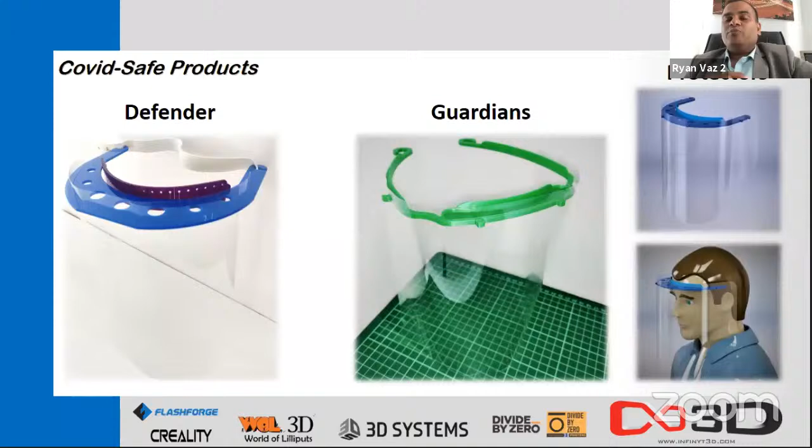These 3 models were the ones that were running around, that were being used. We made about 4,000 face shields, and we gave out 3,000 for free, and around 1,000 of them were sold.

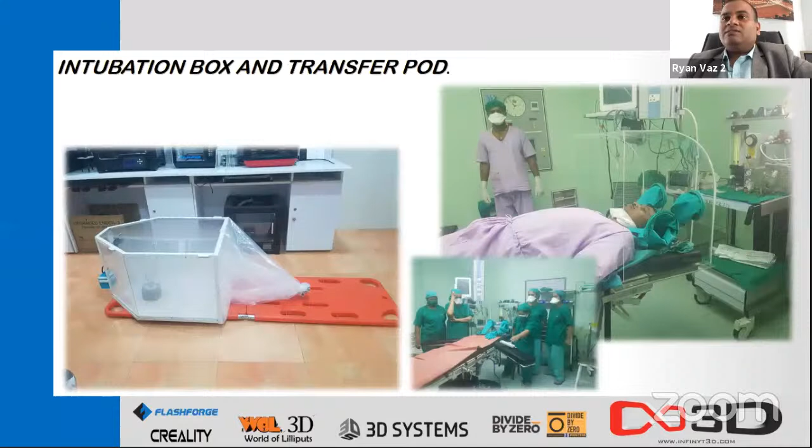We also made something called an intubation box. When a doctor is putting a pipe into the person's throat, that process is called intubation. When he does the process, the patient tends to cough and leave out a lot of spit and blood into the air. To avoid the blood and spit falling onto the patient's face, they wanted a covering. A face mask does not really help. So we made this kind of a box wherein the doctor stands behind, puts her hands in the gloves, and does the process of intubation.

Similarly, the Navy asked us to create something called a transfer pod, in case there is a patient that needs to be taken from one place to the other, and they do not want the risk of someone else getting infected, or the driver, or the pilot getting infected. So they asked us to develop this pod. The shell has been done by the Navy themselves, and we did the concept, but where they were stuck on was this. It looks like a simple plastic thing, but it required a lot of thinking on how to sort this out. The solution that we finally gave them was so airtight that smoke did not come out of it. This was the smoke test that is going on.

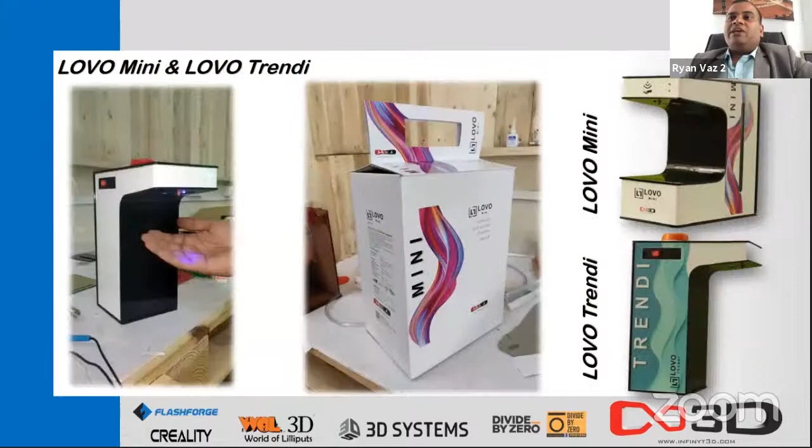And then finally, we came out with LOVO as a product. The LOVO is a sensor-based sanitizer dispenser, and this has been doing very well in the market in the last 2 months since we launched it, and we are having good fun marketing it and learning new things in this entire process.

Coming back to 3D printing, what is 3D printing and how can it help you? All these products that were developed, somewhere or the other, we used printing to come up with these products. This 3D printing helped us build this product range for us. And not just us - these are products we ourselves developed, but during these 6 months, there were a number of people who came to us saying they want to develop new products and new items, and we were helping them with it.

Let me take you through a small journey of what 3D printing is. If you look at the gallery view, one of the videos is showing one of my printers printing a pot - it's a self-watering pot, and you can see it live. That is being printed on an Ender 3 using PLA material, that is polylactic acid.

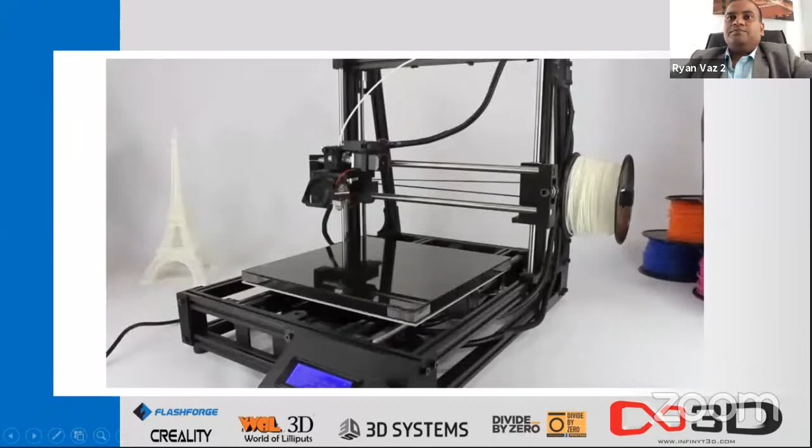Let me just show you a small video that will explain to you the 3D printing process for those who do not know.

Now, the Eiffel Tower over here has been printed on this machine. The machine starts basically with nothing, and that is why it is called an additive manufacturing process. There are 2 ways that you manufacture: one is you add, one is you remove. In a normal carving process, you take a block of wood and then start chipping off. But in additive manufacturing, you start with 0. Here the plastic goes right on top and then comes down, melts through the nozzle, and is poured out in a very precise form to create any product that you want.

And that is the beauty of 3D printing - because it is additive, it can make complex structures. It does not care how complex your part is, it can just print. Of course, there are certain rules that you have to follow for 3D printing. If you follow those rules, you are able to do some amazing stuff using 3D printing.

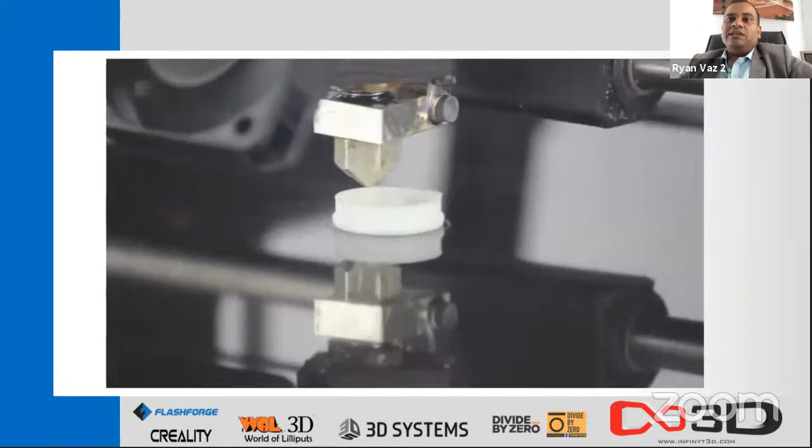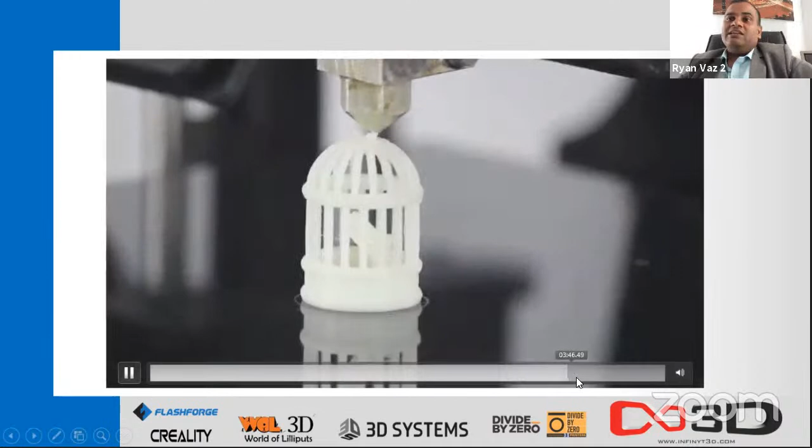Let me go very quickly with this because we have very little time. So what it does is basically print a layer, and then it created this. Now it is printing the 3rd layer, and progressively, layer upon layer, it keeps printing till you get something like this. As you can see, it has started lifting up and creating an object. What it is creating here is a bird inside a cage, and this is possible only in a technology like this - an additive manufacturing technology. It is creating a bird inside a cage in a single piece. Any other technology, you would probably have to do it in 2 different pieces and then join them together. That is where 3D printing has an edge over all other technologies.

So how does the 3D printing process work? It starts with an idea.

You take an idea, and a lot of us keep getting ideas, but we don't do anything with it. These ideas come in the strangest of moments - when we are walking on the beach, sitting in the washroom, having a bath, when you're cooking - and then you get an idea, and you never know, that idea could be one of the best. However, because of the constraint of how we're going to manufacture, where are we going to manufacture, we forget to make use of this idea. I would strongly recommend that if you have an idea, start either jotting it down, or if you know designing, then go to the next stage and start designing and making your idea real. Because a lot of good ideas die in our brains itself. I would love if a lot more people started paying more attention to their ideas.

So you start with an idea, you then create a design of it. Then there is a small process of analysis to check whether the design is good, whether it is printable, whether it is workable. You might want to do your design tests. Okay, and then you go through a slicing software. 3D printer does not understand what you design. All it understands is a series of codes which says go here, pour this much plastic, go there, pour that much plastic. To translate your design into something, we use a software called a slicer, which understands your design and then converts it into codes. And then you go to 3D printing.

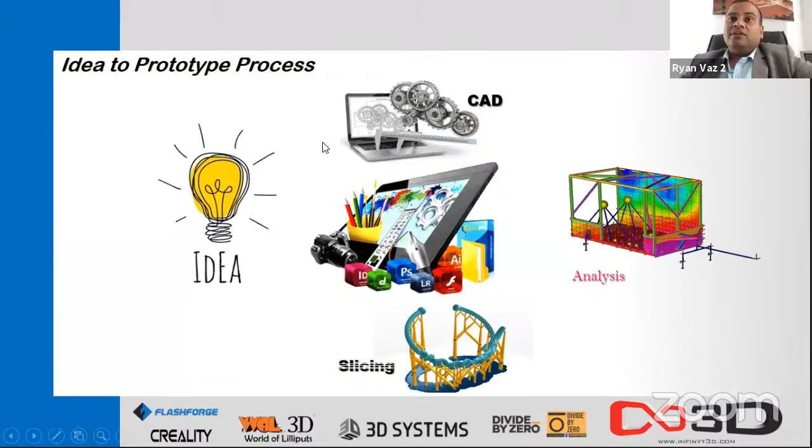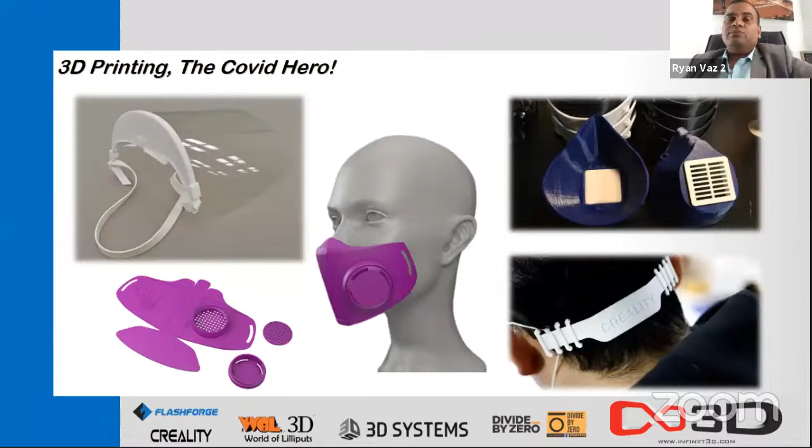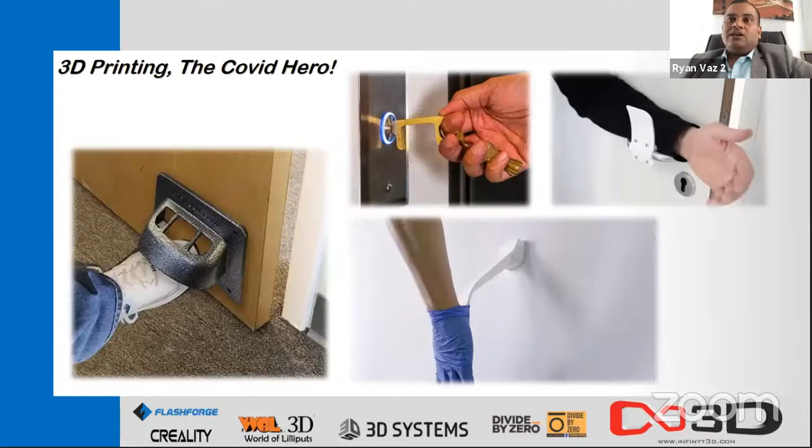3D printing also has made things like this. So this is the COVID key. Basically, you use the COVID key to not open anything directly. You can carry your bags with it. You can open doors with it. You can touch your buttons, the ATM buttons or the lift buttons, using the COVID key. This is so that you don't touch your hand to the lock or to the latch. This is to remove gloves.

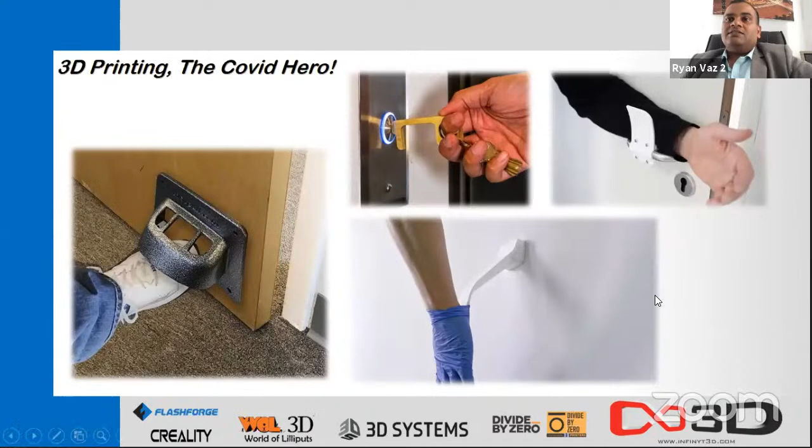Recently, I read an article that said a lot of people, nurses and doctors, were infected not during the process of treating patients, but when they were actually removing the gloves, because they did not know how to remove the gloves properly. And then when there was virus on the gloves, it would touch them. And that was very sad, because after they finish an entire day, when they are wearily pulling off the gloves, that is where they get infected. So 3D printing tools like this help them remove gloves.

And then for doors, to open and close them, you now have a foot puller. This is called a foot puller, that has been 3D printed and then fixed to the edge of your door. So you don't use your hand, but actually use your shoes or your legs to open and close a door. Now this is just a few examples that I was able to pull out to show you, because otherwise I would have a few slides only on this. But this is basically telling you what 3D printing can do. Open your mind towards what you can do using the same technology to make things and life easier for you. Any technology that makes life easy is what makes it valuable. And 3D printing can do it. However, a lot of us are not able to connect how this can actually happen for us.

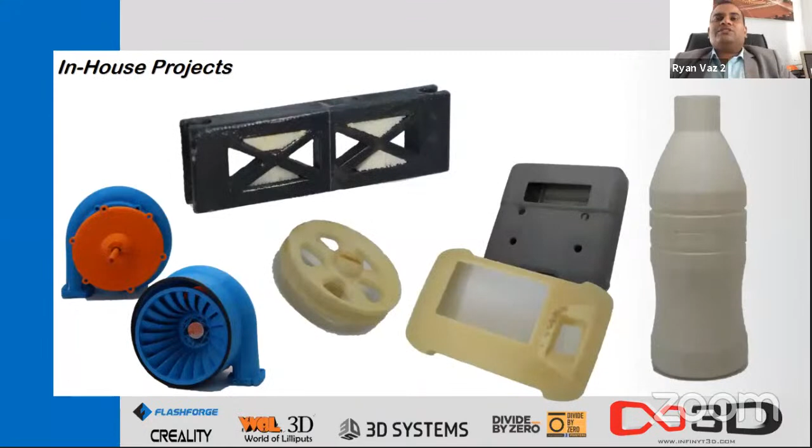Here are some of the things that we did in our office. This is a very old project, almost about 5 years back.

A company wanted to create a modular bracket system to hold pipes, and this thing had to be taken to the US. They created a modular system like this. What you see are small keyholes, wherein the other parts slide in. This has been 3D printed, which supports the sliding, and it creates an entire round bracket. This is just one part of it. This entire set was then taken to the US and they tested it over there. I'm not sure whether it was successful or unsuccessful, but yes, we delivered it successfully.

Over here we have a bottle. A bottling company came to us. It seems that a year back, when they ordered a new mold for a bottle, and the mold came and they actually started production, they realized that they had ordered a 250ml water liquid container, and the bottle itself was 250ml, whereas government stipulation says it has to be 25% more than the actual quantity it is supposed to hold. So they were forced to rework on that mold, and that cost them quite a bit.

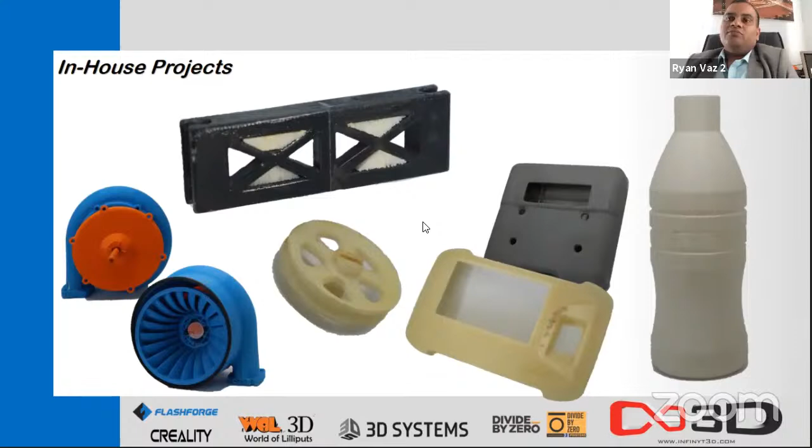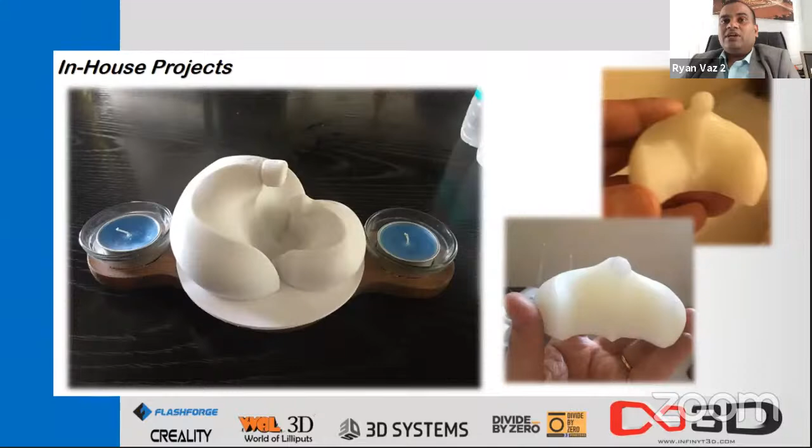Which they approved. And then finally we made wax molds for them and gave it so that they could give the wax molds to them. This was a very interesting project. Took a lot of our time and energy, but it was quite fulfilling at the end.

What are the immediate applications for 3D printing and where all can we use it? Did you know that a lot of your jewelry, someone told me 90%, someone told me 80%, but I'm quite confident that a lot of your jewelry today is being done using 3D printing.

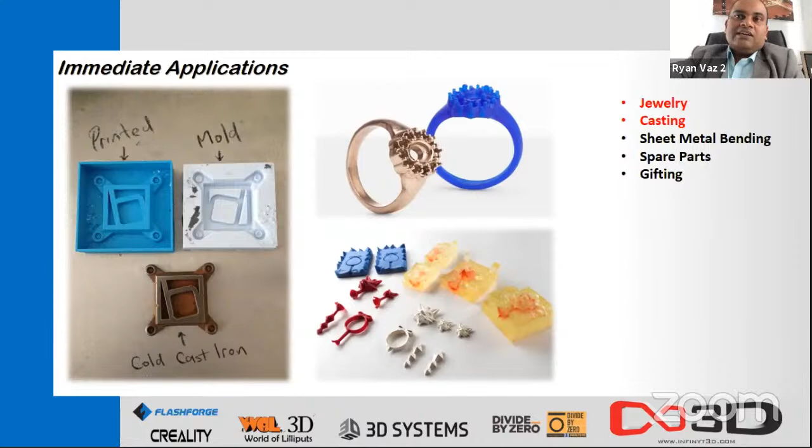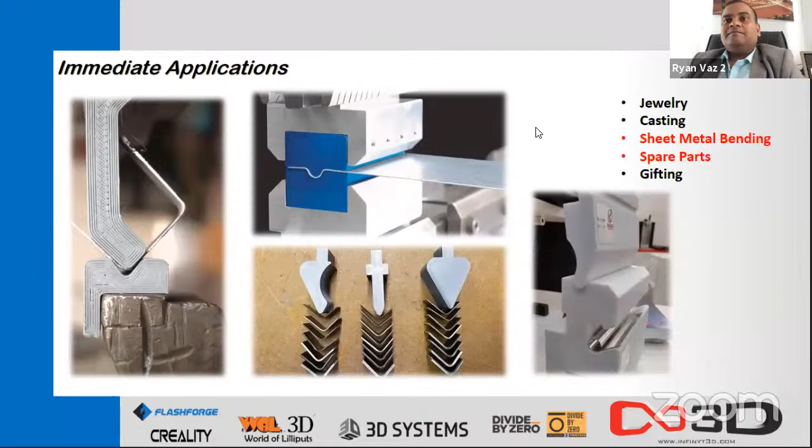Gifting. It's amazing how customized and how interesting you can make, or rather how gifting can be made using 3D printing.

Here is a small celluloid lighting fixture wherein you put lights. It gives brilliant, lovely shadows along the wall, and we've made it glow in the dark using the dark filament. So when the light goes off, this thing shines a brilliant green.

Here again, a night lamp, which is called a lithophane, which basically allows a certain amount of light to pass through, and through that it creates lovely pictures. We have done this for a client wherein he's created his entire family pictures onto this night lamp. Google had an event a couple of years back, and for all their guests and speakers, we gave them this lithophane, which looks just plain and white when it is switched off, but when it is switched on, it looks like this. All it needs is a photograph.

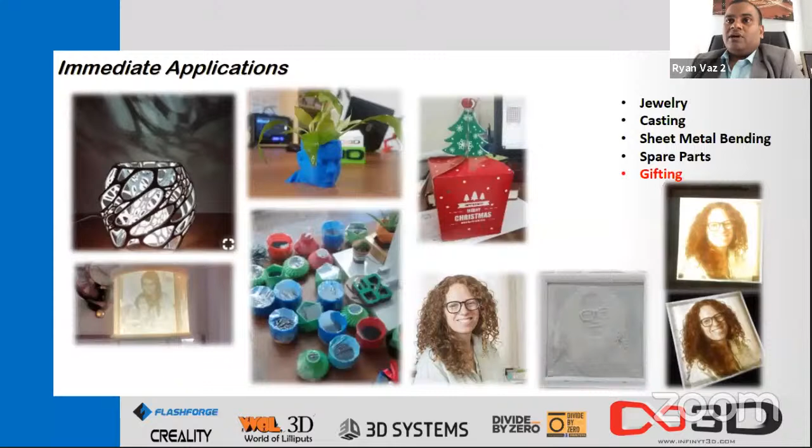Making a container also is quite costly. Using 3D printing, we can actually create a container or an enclosure that perfectly fits your circuit boards, and if it's your requirement, gives it an aesthetic look, gives it a professional look, and you can pitch it to your customers, or you can create your own device.

I know of people who have made their own mini computers using this, wherein they used a Raspberry Pi, connected to a screen, and then used a 3D printed enclosure around it. I know people who have created a number of devices, some to check blood, some to transfer data. So many things people have done when they've used the 3D printed enclosure around this.

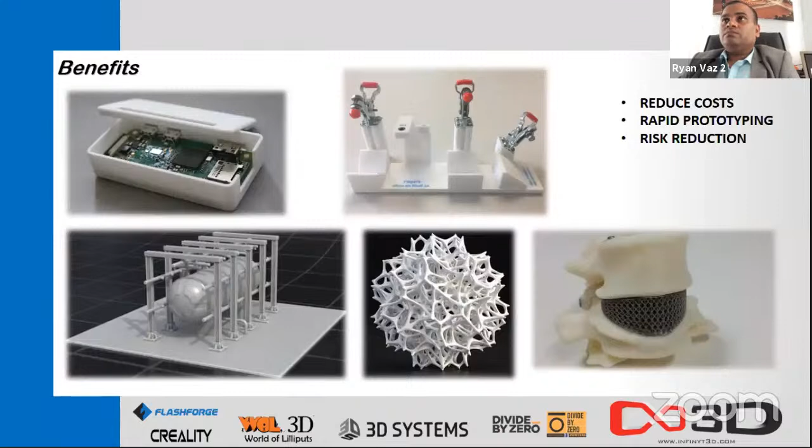3D printing also reduces your risk - a risk in terms of your idea failing, a risk in terms of understanding where the failure points are even before it fails. It helps you get a real life perspective of what your part will be, what your product will be. You can create the part, look at it in miniature, and say, okay, this is how it will look, this is how it will feel. Maybe it is good for me, maybe it is not.

3D printing allows you to prepare very complex parts. In the medical industry also, there are some students, some doctors who wanted to operate on a girl. It was a brain surgery. Rather than doing the operation directly, they 3D printed her skull, did a mock surgery on the skull first, timed it, and then they opened up her brain, so that they were sure of what they're going to do.

Similarly, here there's a spine, and they wanted a fixture inside the spine, and they 3D printed it. Complex stuff like this can be done using 3D printing, because 3D printing also gives you design flexibility. Complexity is free in this, and it helps you cross boundaries which before you could not cross.

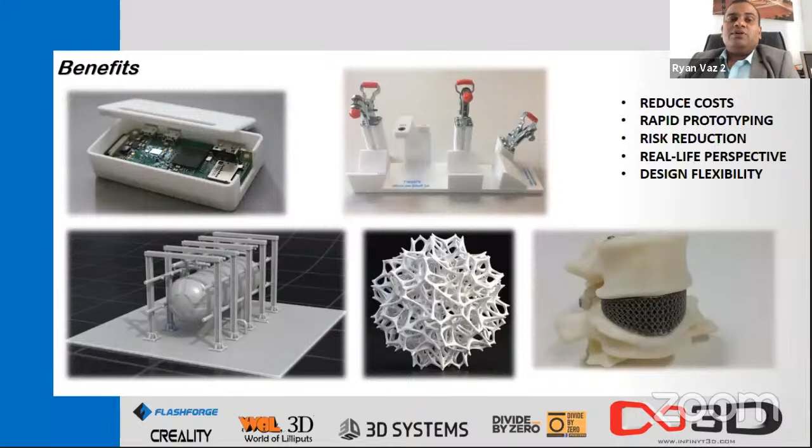Here are some examples of things that are happening around the world. I've got another 15 minutes, I guess.

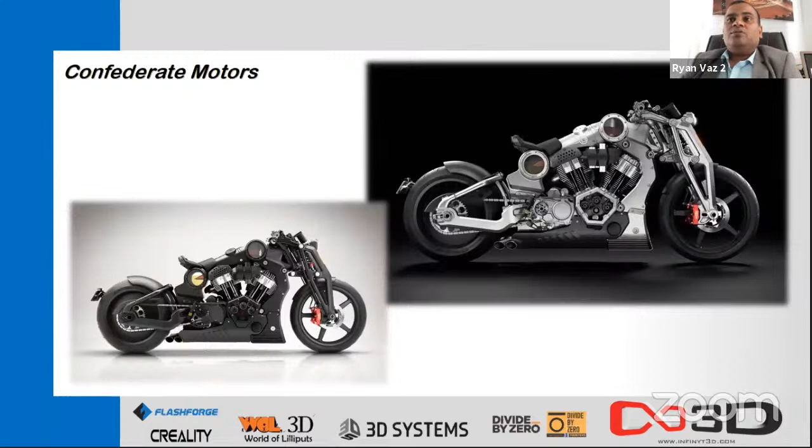This is a company called Confederate Motors, which manufactures some 60 or 70 of these bikes in a year, and they say that it is possible only because of 3D printing. So 3D printing using SLA parts, they do high precision parts, cast them directly, and then build bikes. These are combat bikes, and they look really awesome. You can look them up. They've got an amazing range of bikes, and this is possible only because of 3D printing. This complex design is possible because of 3D printing.

When the lockdown happened and the supply chain collapsed, the hospital in Italy was facing huge difficulty because they could not get respiratory valves. The company which was manufacturing these valves also said, we cannot do anything.

The entire thing is locked down. We cannot supply it to you.

At that time, two guys, Cristian Fracassi and Alessandro Romaioli, went to the hospital, took their 3D printer over there, designed, measured, and created 3D printed valves on the spot. They then tested it there, went back home, and within 24 hours created about 100 of these valves for just under $1 each. That was a big slash in price.

There are contradictory reports, but one says the respiratory valves were first costing some $10,000, and these guys manufactured it for just $1. This design was then replicated and shared for free, and a lot of other people started making these valves to help other countries as well.

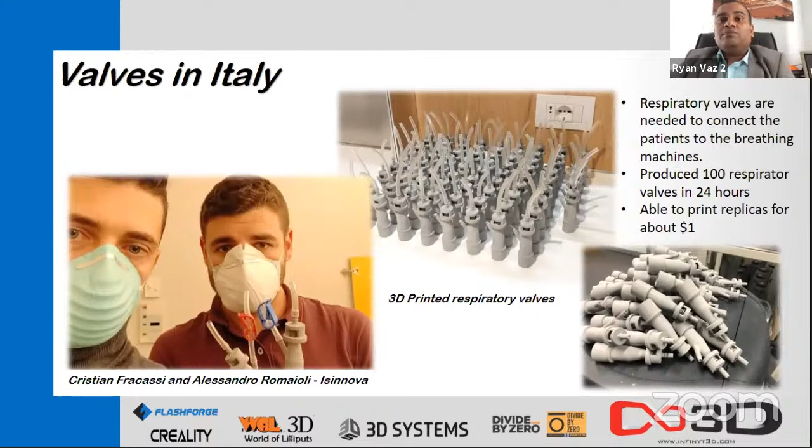This is simply awesome.

If your son asks you, can we print a car? Can we make a car? You probably say, what nonsense. But Sterling Backus and his son were doing a virtual drive on the Lamborghini, and the son asked his father, can we print one? And he says, okay.

And guess what? They actually got together using a Creality CR10S 3D printer and 3D printed this entire car. And no, it is not just a model, it's a working car, an actual working car. They used an engine from another car - I can't remember the name. They used some parts of the Lamborghini, some parts of Audi, and 3D printed most of this body. Then they realized the 3D printing would not sustain load.

So they 3D printed the part and then did carbon fiber covering over it. It has got, oh yes, there it is on the screen, a 5.7 liter engine from a Chevy Corvette, and they have done carbon fiber encapsulation for this entire thing.

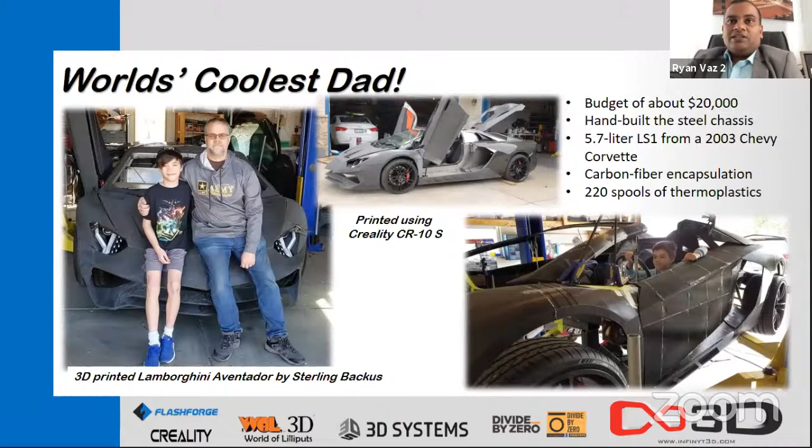This is an amazing thing. It is still going on, still work in progress. You can just search for 3D printed Lamborghini Aventador and you will find this on Facebook. There's an actual page devoted to this entire project. This is really an inspiring and interesting project.

If you thought that 3D printing can't go big, then this is how big it can get. This is the world's first 3D printed neighborhood. It's a 152 square meter house. The actual walls take 24 hours to print.

And then in the next 48 hours, I think they do the roof and the doors, and the house is really beautiful. They have done about 50 of these houses in this community, and this is a project by an organization called New Story, using a 3D printer called the Vulcan 2. Icon is the company that manufactured this 3D printer, and I think this is again another very inspiring story of how they have brought 3D printing to help people in need.

There was an earthquake in, I think, Haiti, and the owner or founder of New Story was there, and he was feeling very upset that there was nothing that could be done, and nothing that could be done fast. So he started this community called New Story and started this entire project.

And if you think that 3D printing has not entered the food industry, then you are wrong. This is a company called Food Ink. They've got around 7 restaurants across the world - in Barcelona, Lleida, London, Netherlands.

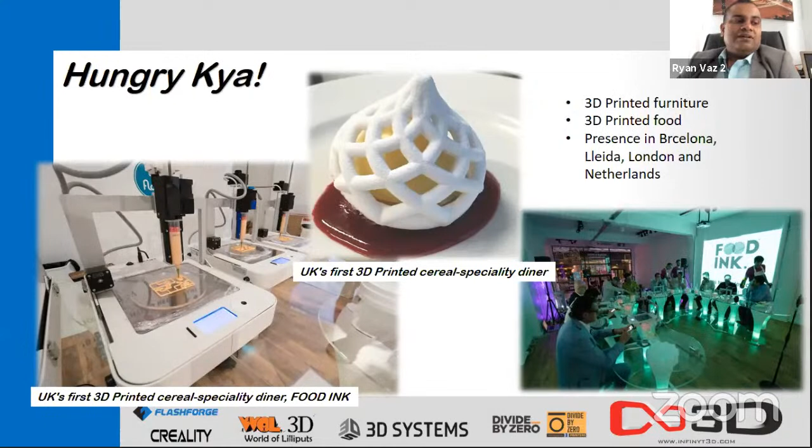You're one of the first guys to try something like this. Everything is 3D printed, including the vessels they serve in, including the furniture they are sitting on. Every single thing is 3D printed, and that makes it so much more interesting and fun.

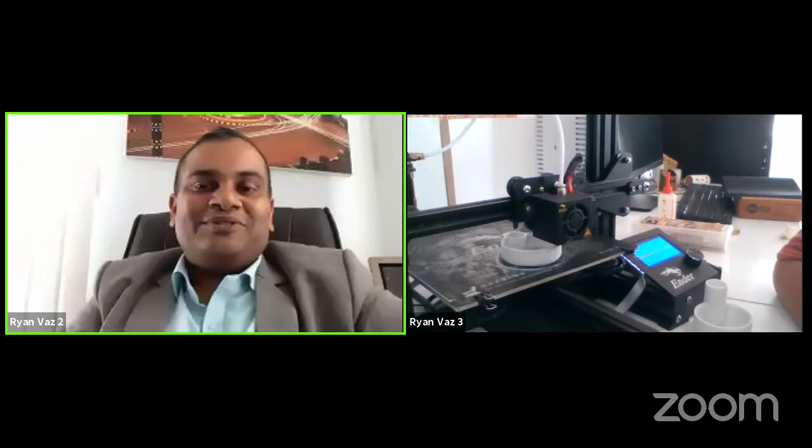Can we design on phone, or do we need a computer? If there is an app that can help you design easily on phone, go ahead and design, as long as the design is created and can be exported in a .stl file.

Where do we apply for the innovation lab school? So you look up NITI Aayog, just search for ATL, Atal Tinkering Lab. I think they've got a special section called ATL. Search for ATL application, you'll get it.

Sir, the houses you showed, are they disaster safe? Can they protect from the wild? Yes. These houses have been created in earthquake areas. I met someone a year back, from Kolkata, who has already worked on these houses, and he told me that they have tested the houses in Japan. They have done various types of testing including weather testing and stress testing, and destructive testing to see where it fails, and it is a very good option for refugee houses.

Should we educate kids and children regarding 3D printers? Yes, you must include 3D printing as part of your activities for kids. It not only helps them improve their thinking and creativity, it also helps them start thinking differently. With all due respect, schools teach us to think in one particular track, whereas 3D printing, 3D pens, are one of those avenues which help them think differently. So I would strongly recommend it.